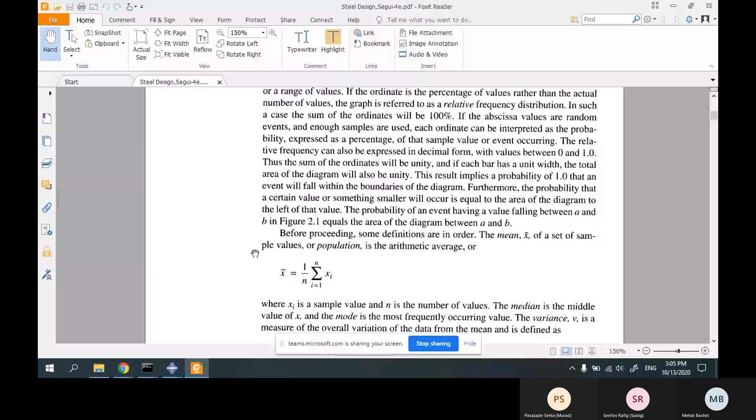What was the last thing? Do you remember? For steel design. Do you remember that, Sehla? What was the last thing? I don't know. The last lesson, teacher. Yes. Okay. The last lesson, the brittle material, ductile material, also brittle materials. Understood. Okay.

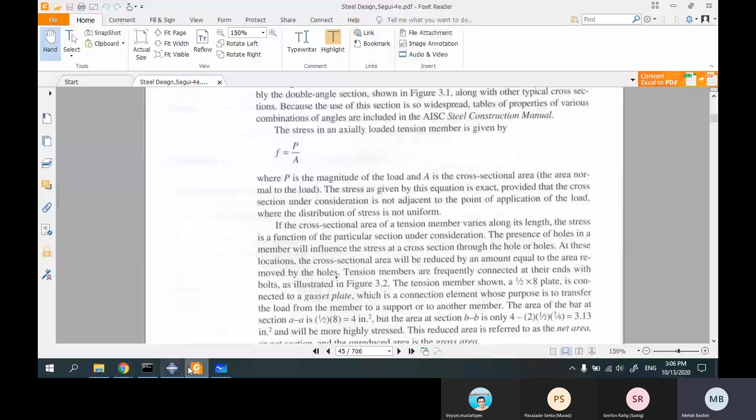So, let me check if it's recording. Okay, it's recording and you can see my screen. Okay, from now on, you have to use two books. One of them is a textbook, steel design, that I'm teaching. The other one is the specification. Specification is AISC. AISC, American Institute of Steel Construction. So this is AISC 360. This is the book that I'll upload. We can see it here, AISC 360.

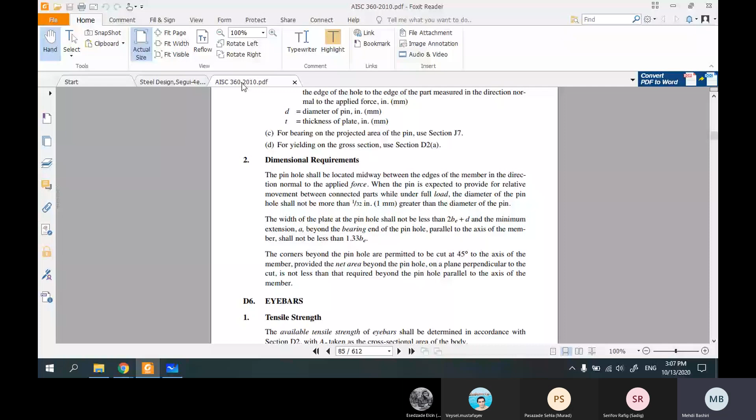And in this book, we have different chapters. In steel construction or steel design, we have to use equations and relationships that are not easy to derive. So I'm not going to ask you where, for example, this equation comes from. You just should use it.

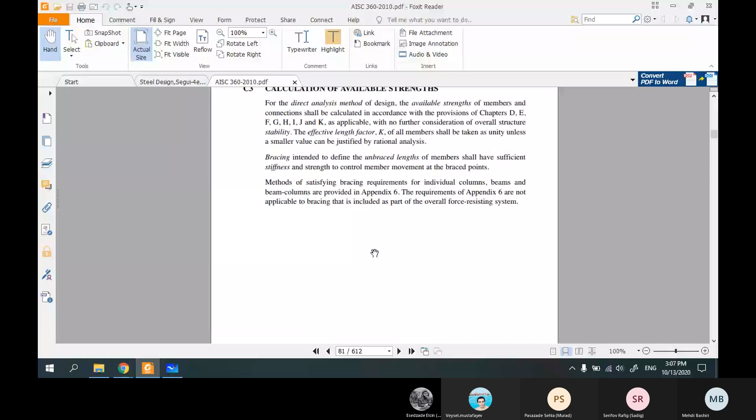Let's go to chapter D. This book has different chapters. Chapter A, B, C, D, whatever. We start with chapter D. Okay, we start with chapter D. So this chapter is for design of the members under tension. Okay, what does it mean?

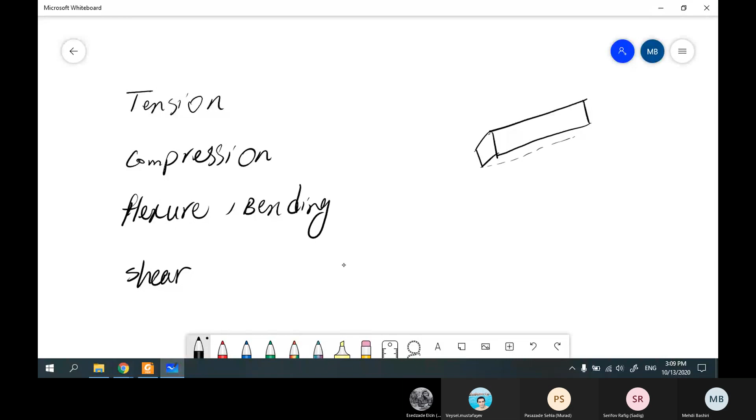If you remember from your different classes, we have different types of loading. One of them is, for example, tension. The other one is compression. The other one is flexure, or bending. The other one is shear. Depends on the loading. For example, you have a member like this. In this case, this member is under tension with the load T. Okay.

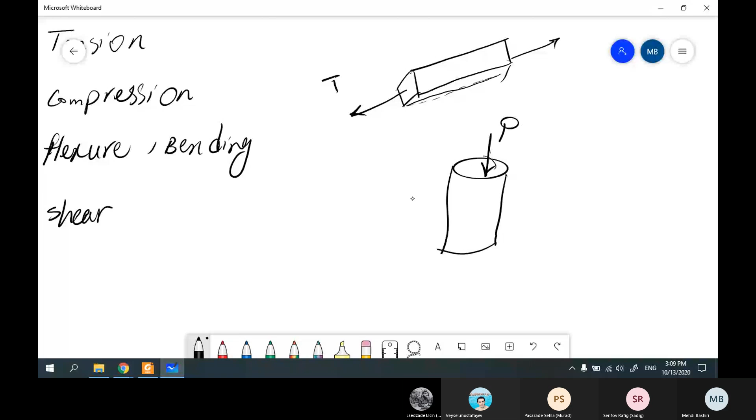In this case, for example, if we have a member with this force, the member is under compression. If we have the other case like this, for example, a beam, you know these different cases from structural engineering or from strength of material. I'm just going to review it. For example, if we have this type of loading, this is shear, this is compression, and this is tension.

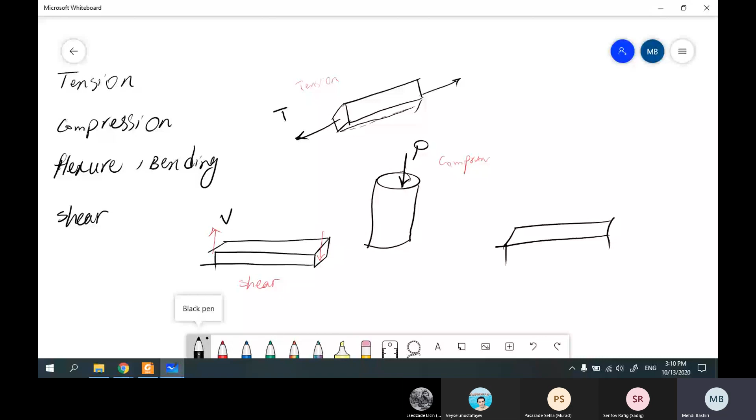Mainly, we show tension with T, compression with P, shear with V, and bending, the other type, mainly in beams, is moment. Bending is moment, like this, with M. Okay. So if I ask you to design a steel member, first of all, you should know what the loads acting on this member are. For example, this is a two-story building. You want to design this. In this building, we have different members.

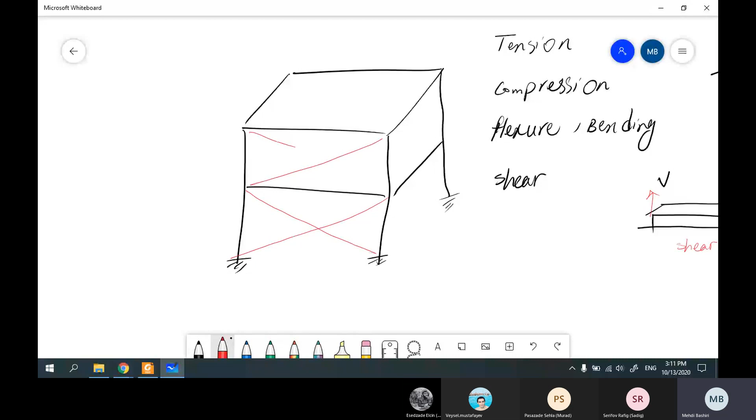They are beams. They are columns. These are braces. So we have different types of load, for example, dead load, live load, and their factors. I think we talked about it, yes, about dead load, live load. For example, one of them is 1.2D plus 1.6L. We have different loads acting. So depending on these loads, we have different responses in these members.

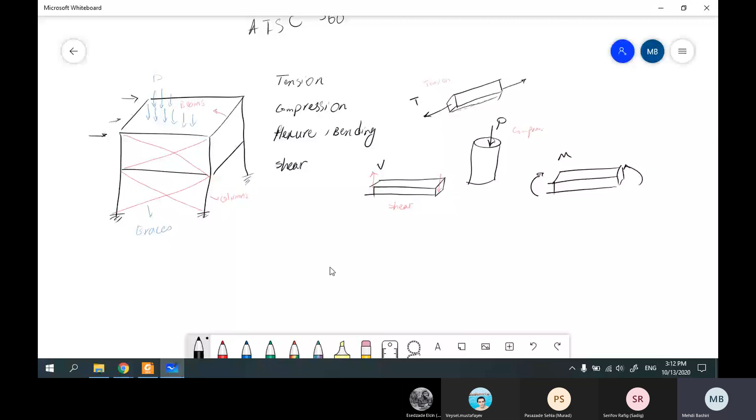For example, if we have these loads, braces are under tension. We use braces like this red one to resist against lateral loads. For example, earthquake, wind, they are lateral loads. They're acting from the sides, not from up or down. So we can resist against these loads. I'm just going to give you the whole idea about these parts. So, for example, we have braces, X brace, or let me see if I can show you the braces.

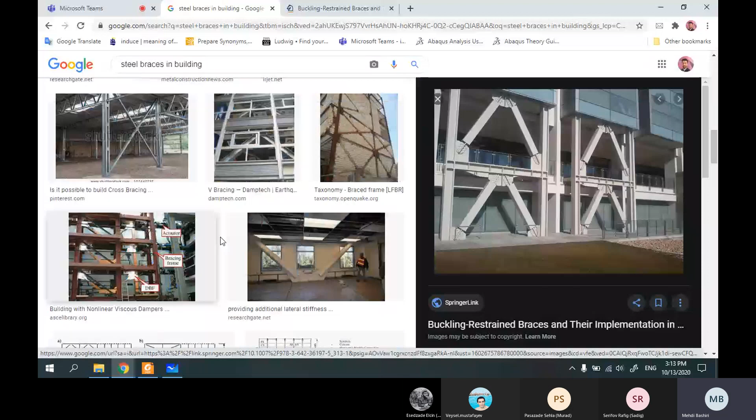For example, look at here, they are braces. Can you see it? Here, they are braces. Okay. The other types here, you can see that they are steel braces. We use them to resist lateral loads, and because of their type, they're mainly under tension. Okay, they're mainly under tension.

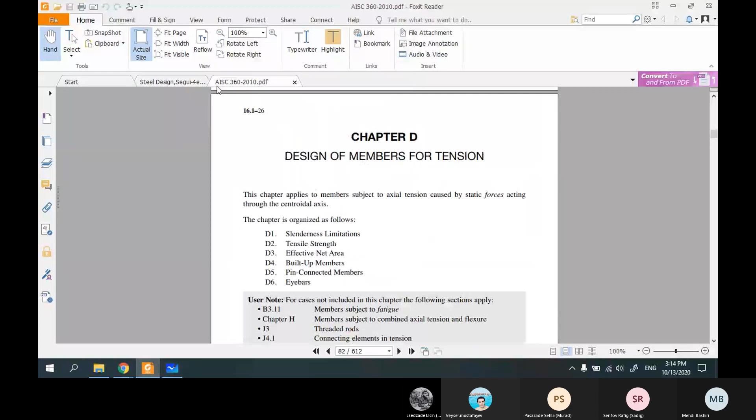When we want to design a member under tension, you have to first... This book explains the whole phenomenon, the whole concept in detail. So if you want to learn more about this type, you can read this book. But mainly, if you want to design anything in future, you have to use this book. It's AISC. Why? Because here it says that when you want to design, you have to use this formula. You have to use the other factors. Okay, effective area. So here you can have all the information, or you can have a summary of all the information because it's summarized. Anyway,

so let's talk about the designing of tension members or members under tension. In all the cases, not just for tension, for compression, for flexure, for shear, in all cases we have different failure criteria. What does it mean? It means, for example, let me show you. I have a project right now. I can show you this.

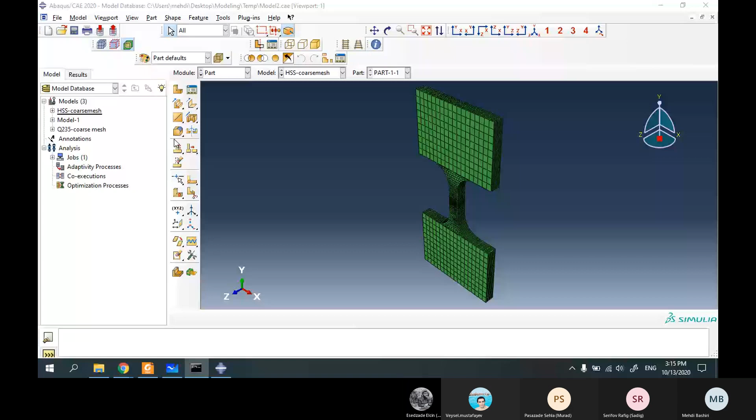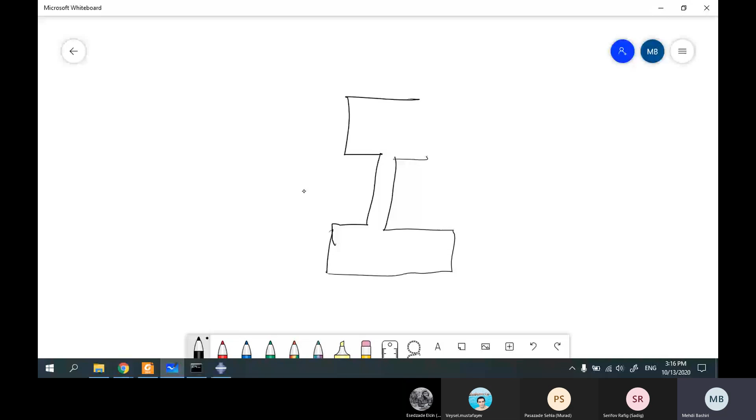For example, this one. This is a member. For example, here you can see that this is the force, and this is a member, a steel member, and look at the direction of this load. It's like this. We have a member like this, under tension. Okay, this is tension. We'll see that if we increase the load, what's gonna happen? Look at here. This is the failure. We'll have rupture in here.

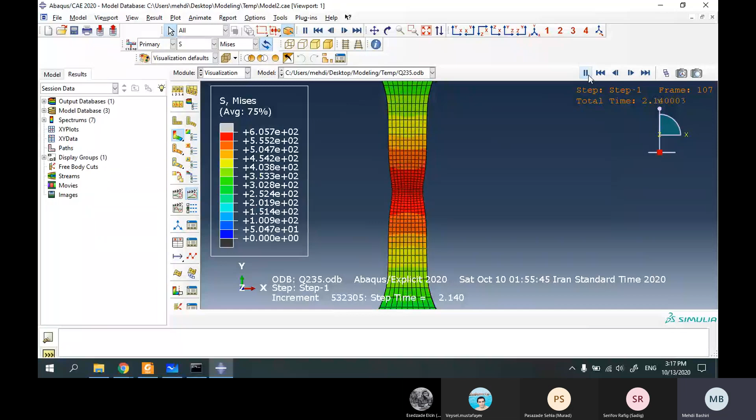Let me show you. At first, you can see that. If you remember, I told you about necking. Okay. At this part, if you focus, you can see that we have necking in here. One of the failures so far is necking, or yielding in other words. And if we increase the load, what's going to happen? Failure. You can see that we'll have failure and finally rupture. Okay, you'll see that this is the rupture.

So if I ask you what are the failure criteria in tension, you can say that one of them is yielding. The other one is rupture. Okay, so if you want to design something, you must check if the member resists against these failures. So it's obvious when you need a member, you shouldn't let this member fail.

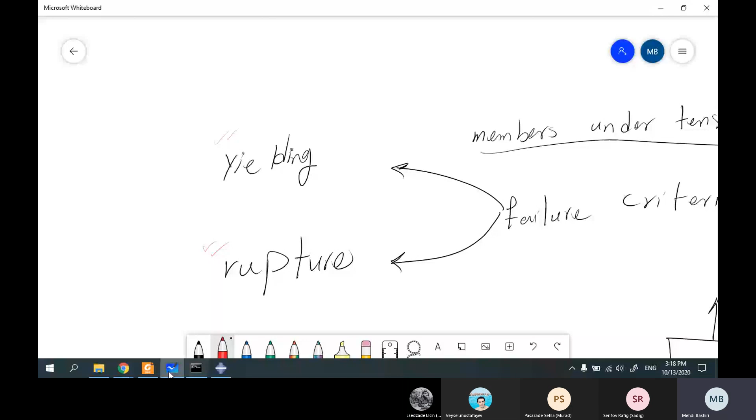Okay, so in this case, look at here. In this part, this member is not useful. You can't use it. It's not functional. If you have a rupture in your member, you can't use it anymore. For example, suppose that in your structure, look at here, you have a rupture in here. So it's not functional, and the structure will collapse. Suppose that you have, for example, a failure here, a failure here. So these failures affect the capability and the ability of your structure. So you have to prevent these failures. How? By following some instructions. Okay.

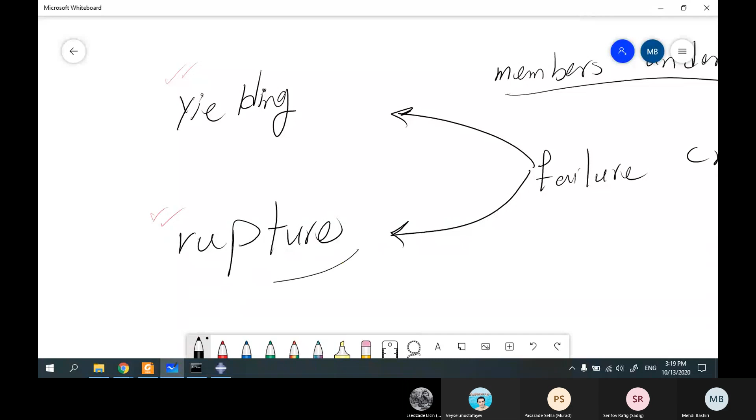Rupture is obvious. I already showed you. This is the rupture. Okay. But what about yielding? If you remember, I talked about the behavior of steel. For example, like this. Okay. This is stress, and this is strain. If you remember, I told you that this part is elastic and this part is plastic. The maximum capacity in the elastic part was Fy, F yield, stress at yield.

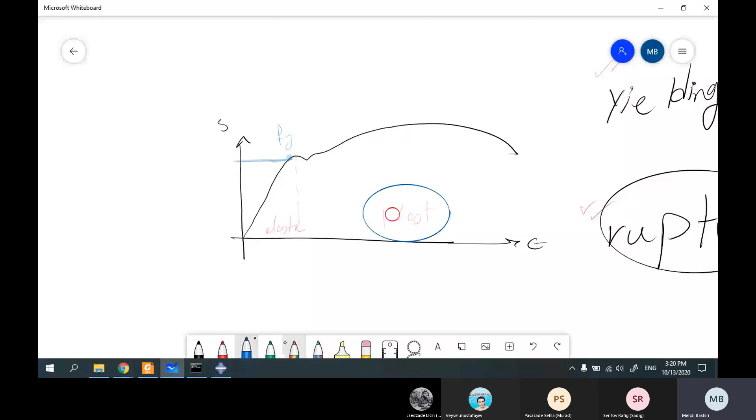I told you that in here it's plastic. The behavior in here is plastic. So in many cases, not in all, but in many cases, if you are in this part, it is not acceptable. So you should avoid being in this part. So the other criterion that you have to prevent from happening is yielding. So far you have to check yielding and rupture. Okay. The other thing that you have to check at the end is slenderness.

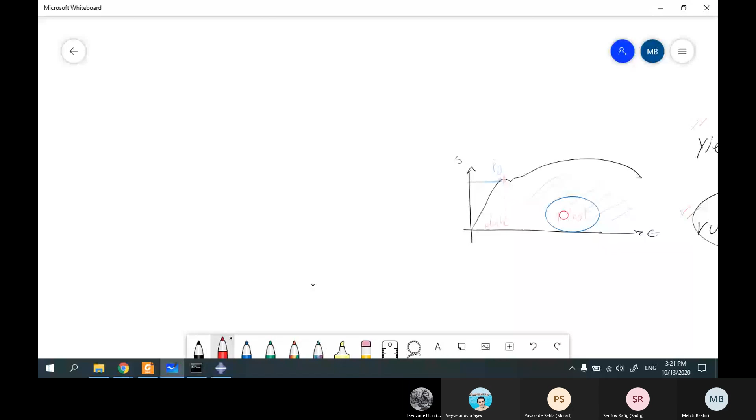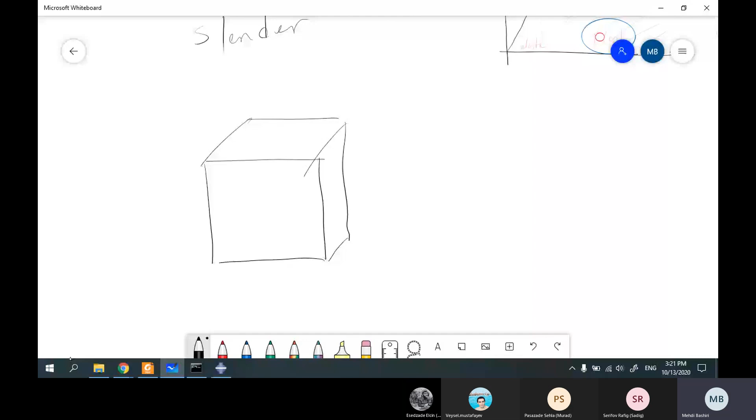Slenderness. Do you know what does it mean, slender? Slender, for example, this is a member in this dimension. For example, the length of 2 meter and the cross section of 1 meter in 1. Okay, you can easily see that these dimensions are somehow consistent. What does it mean? That means the cross section is 1 meter and the height is 2 meter. But what if, for example, we have cross section of 1 centimeter and a length of, for example, 10 meter? Okay, it works like a needle, like a needle.

Okay, so in construction, you are not allowed to use any dimensions that you want. So the dimensions should be consistent, as I said. Or in the other cases, for example, suppose that you are using a column like this. For example, 4 meter in 4 meter in 3 meter. Okay, this one is not economic. You can't use this. You're wasting your money. You're wasting the material. So you have to make a balance between every dimension. Okay.

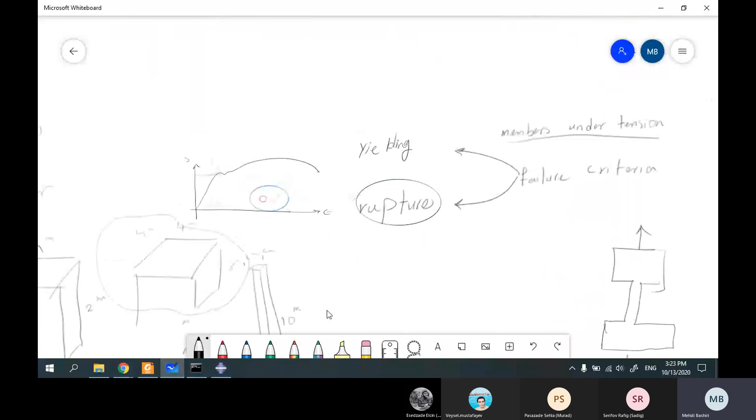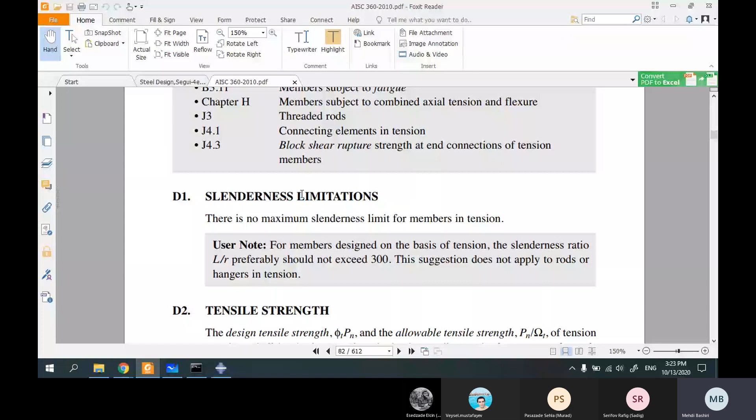So far I talked about the failure criteria. So how can we check all these criteria? Here you can see that from the beginning, it says in here we have to check. The first one is slenderness, and the second one is yielding, and the last one is rupture. So in this chapter, you just need to check these three criteria. So let me summarize it again. For example, I'm asking you to design a member like this. For example, this is a beam. Okay, this is a beam.

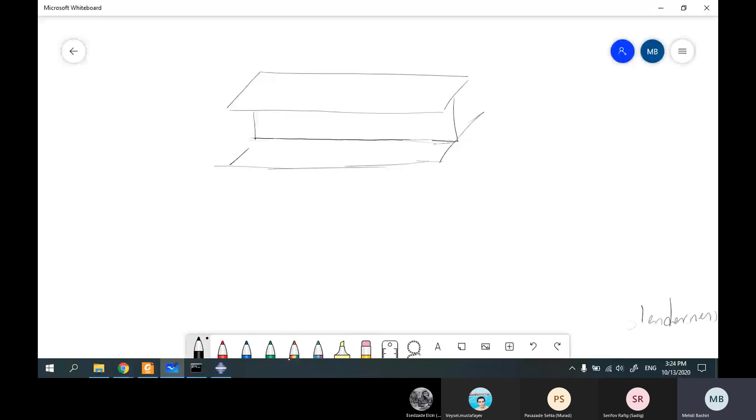If you remember, because of the shape, it is called what? I section. Why I section? Because this section is like letter I. Okay. This member has different properties. One of the properties of this member is its length, L. The other one is its cross section. Cross section is like this. Okay, the cross section is like this. I section.

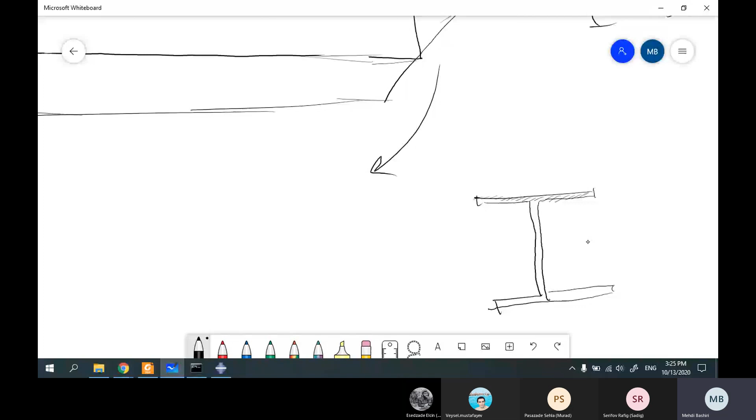This section has different properties again. The most important property is what? Area. The most important thing is area, and we show it with A. The other thing is this one. We show it with B. H, T, with TW, and TF. Okay, TW, TF. What are they? We call this, or we can show it with BF even. If you remember, we call this flange. Okay, flange. This one is called web.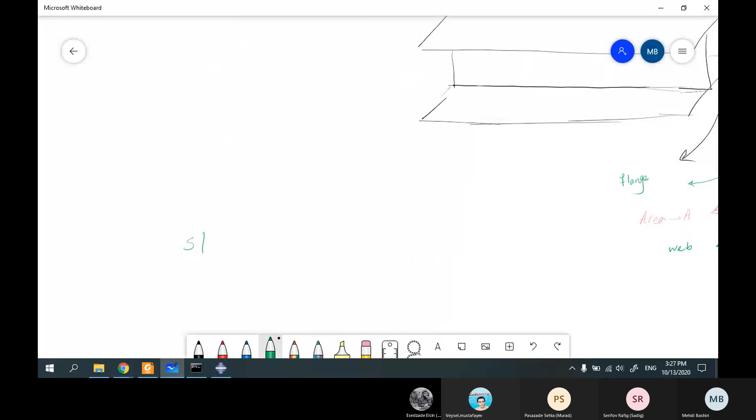Okay, so it's obvious. What is TW? The thickness of the web. What is this? Thickness of the flange. This is the area of the member. And BF is the width of the flange. H is height of the member. So if you know these parameters, you'll know everything. Okay. From the strength of material, you know that stress is equal to force divided by area. Okay, force divided by area.

Sehla, how is the quality? You can hear me well? You hear me or not? Elchin. Sorry. Yes, teacher. Okay.

Okay. I was talking about this one. Stress is equal to force divided by area. So if I want to find the final force, what would be the final force? Force is equal to stress times area. Okay, stress times area.

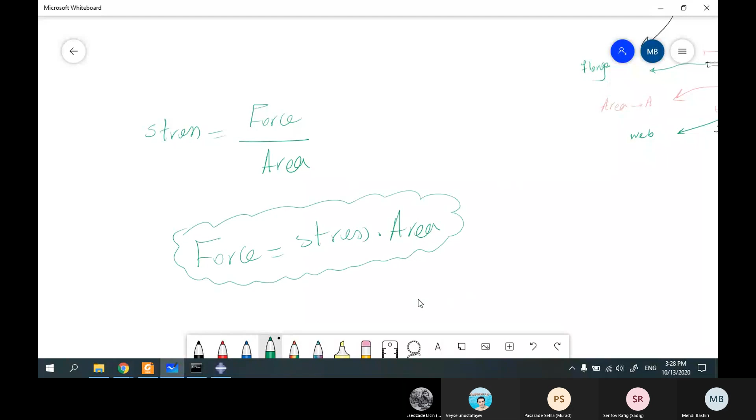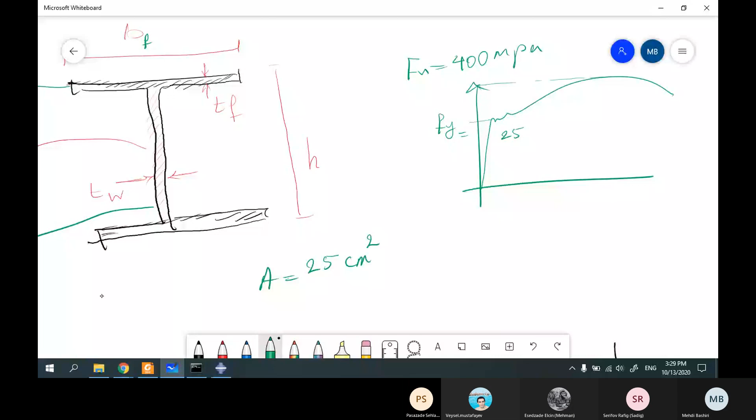So in here, for example, in this section, if I tell you that the cross-section area A is equal to, for example, 25 centimeters square. Okay, the cross-section area is 25 centimeters square, and based on our test like this, I told you that this is Fy and this is Fu. If I tell you that this is 400 megapascal and this one is 255 megapascal, if I ask you, what is the force at yielding?

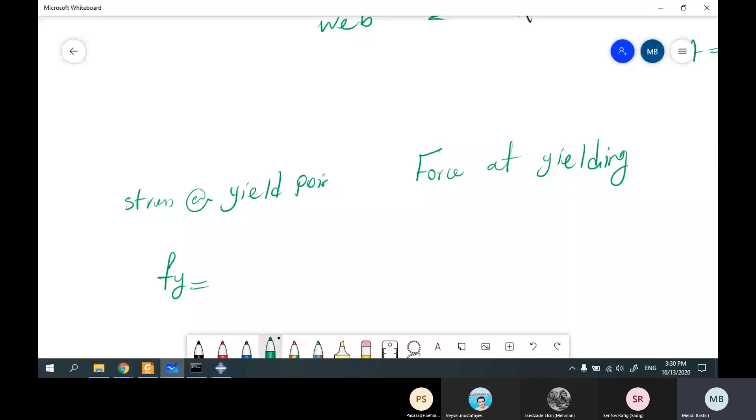To find the force at a yield point, all you need to know is that Fy, as I said, is stress at yield point. Okay, and it is given here. Sir, I'm sorry. Can you repeat the last part? Which one? Yield part? Yes. This one? This curve? Okay. I told you that, for example, in experiment we have such thing. Okay. This is a steel member.

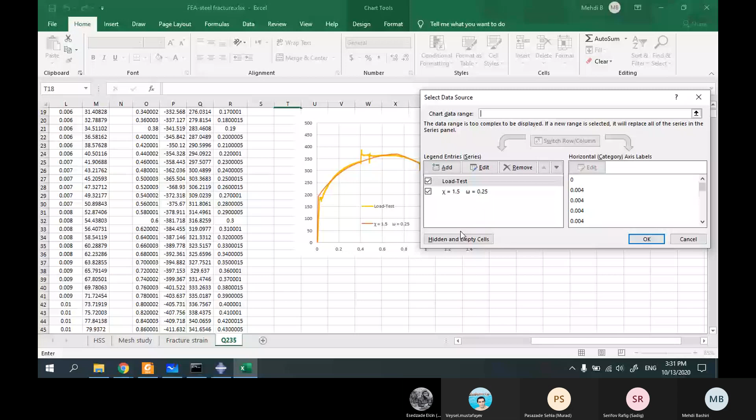Okay. We perform tests on samples like this to find its behavior. For example, before, when I was a student, I performed a test on this sample, and this is the answer of the test. You can see that this is the real behavior of this test.

So after this test, you'll see that before this point, let me zoom it, we have a straight line. It's completely linear. Okay. But at this point, we have nonlinear and plastic behavior that I talked about. At this point, you can see that we have the maximum capacity and then the capacity reduces to 0. Okay, this is the real behavior of steel.

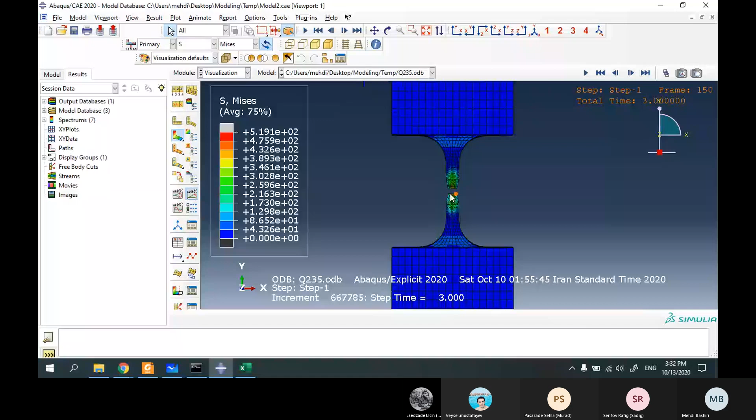So I have this sample and perform a test on this, and as I showed you, this is the test. Finally, we have this. Okay, this is the failure, rupture failure. After performing this test, we'll get this one. In this case, let me show you.

In here, this is F, or let me write it in this way. In here, we have yield. What was the yield? The yield point is a point that before it we have linear and elastic behavior. So you can see that after this point, we have plastic behavior. Before that, we have elastic. And this is the maximum point. What is this? This is ultimate.

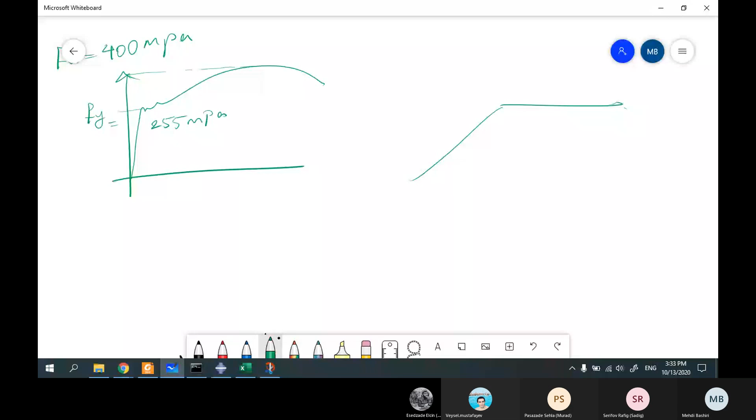But suppose that you are constructing a huge building, for example, a 100-story building, like a tower. You can't test it to see if it works or not. To make it easier, you test a small sample like this, like in concrete technology. If you remember, I told you that we have cubic samples or cylindrical samples. We check the capacity of the concrete with these samples, and when we find the capacity, for example, f'c, we use it in our calculation.

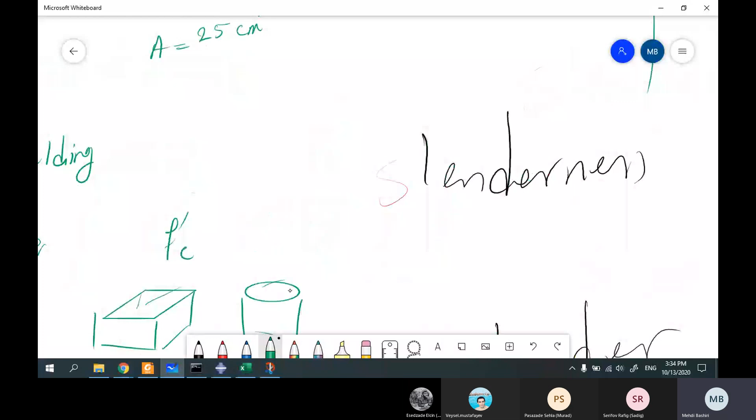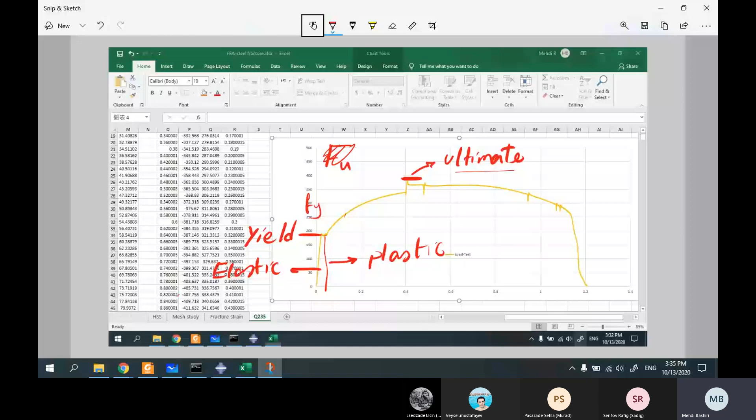We can't test a huge concrete column in the building. So instead, we test small samples, and when we get the information like this, we use this information instead of testing a huge building, and it's accurate. So at this point, we have ultimate capacity, and we show it with Fu. U stands for ultimate. At this point, we have Fy. Sorry, this is Fu, not capital F. So this point is yielding, and this point is ultimate.

So by performing tests, we'll have this behavior. And when we get this one, we can design and check our structure. How? Like this. As I said, we have three probable failures. One of them is yielding, like this.

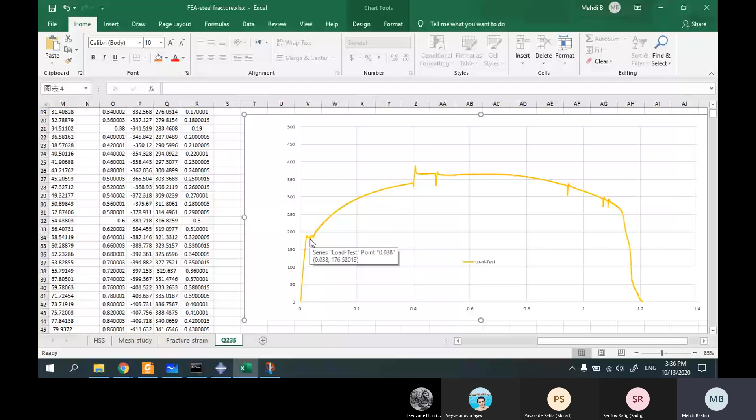Because if you are designing, I'm not talking about a huge earthquake. I'm talking about your load when you are in your home, or in your classroom, or in the kitchen, or wherever. When you are in that level of performance, you are not allowed to be in here. This one is not permitted. When you are in ordinary performance, all you are allowed is here. So yielding is one of our failures.

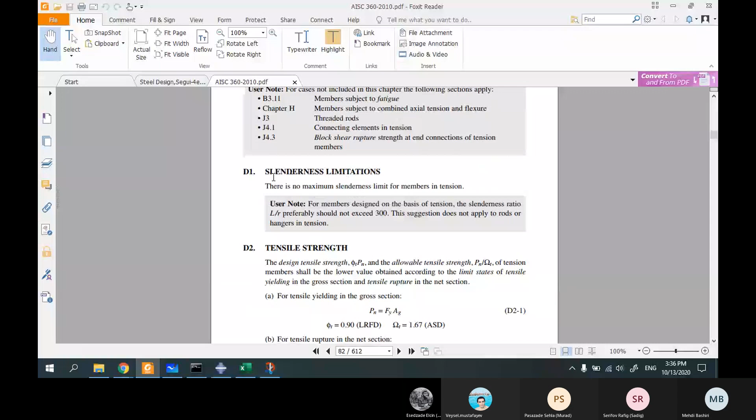The second one is rupture that I talked about, and the first one that I told you is slenderness. I told you that it's not reasonable to use this member for your structure. For example, when you are making fences for your yard to prevent animals from getting inside, you are allowed to use this section. But when you are building structures, you're not allowed to use them. So the other thing you have to check is slenderness. The other one is yielding, and the last one is rupture.

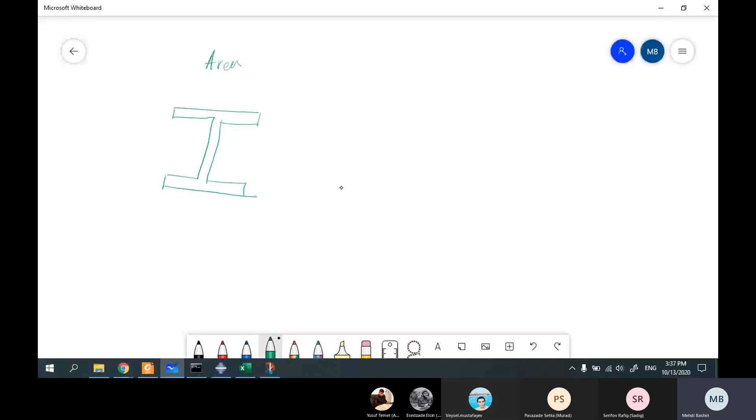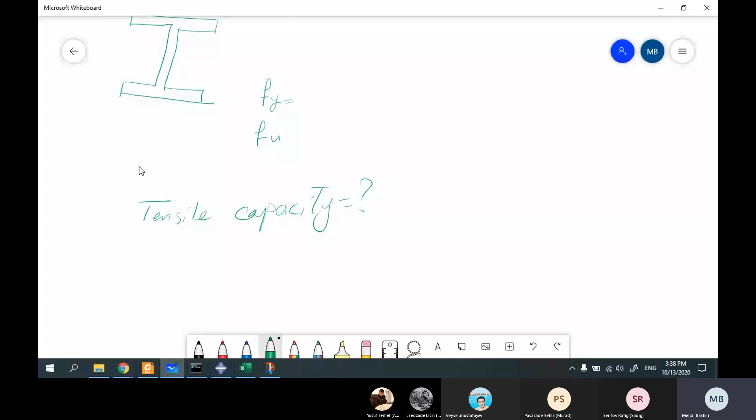Okay. Suppose that I gave you this information. For example, I gave you all the geometry of this section: area, length, and for the test, Fy and Fu, and I ask you to find the tensile capacity. What is tensile capacity? Not just in tension, in all chapters, this is the process.

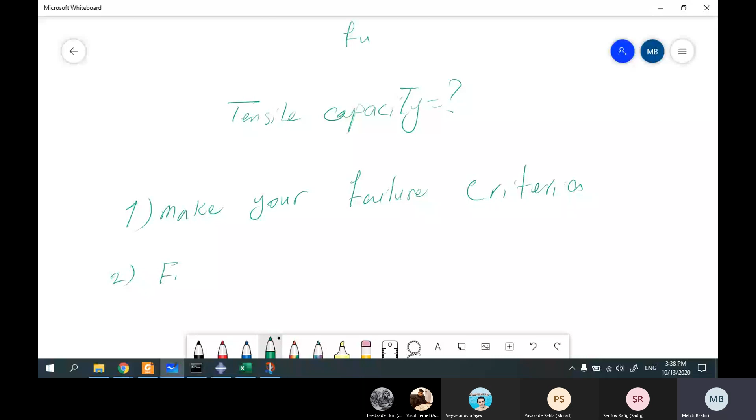First of all, make your failure criteria. Okay. The second step, find the capacity for each criterion.

Three, the final capacity is the minimum amount among all of the criteria.

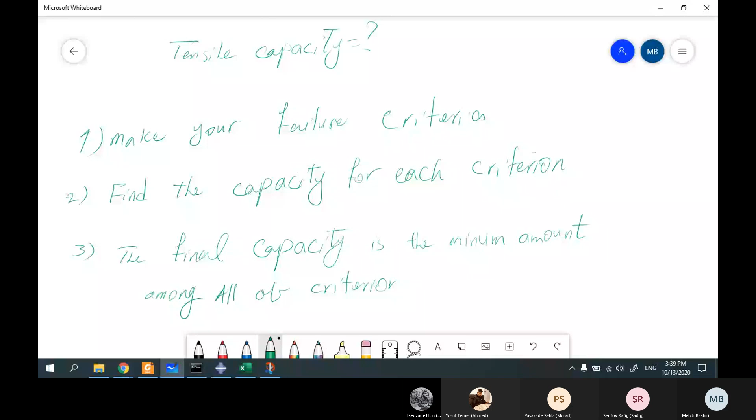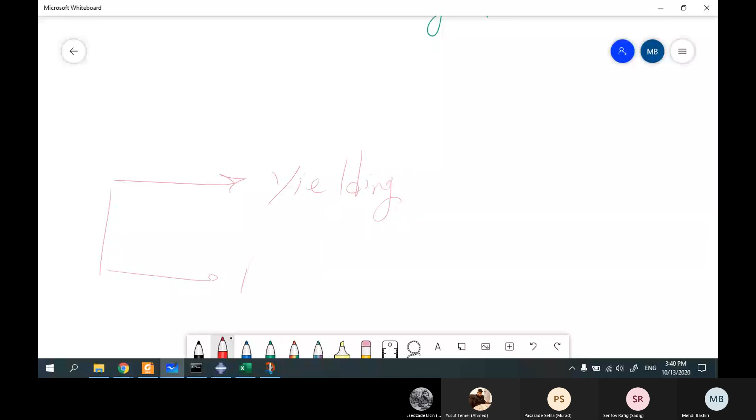At the first step, the main criteria, as I said, the first criteria is yielding. Second one is rupture. And the last one was slenderness ratio. Okay.

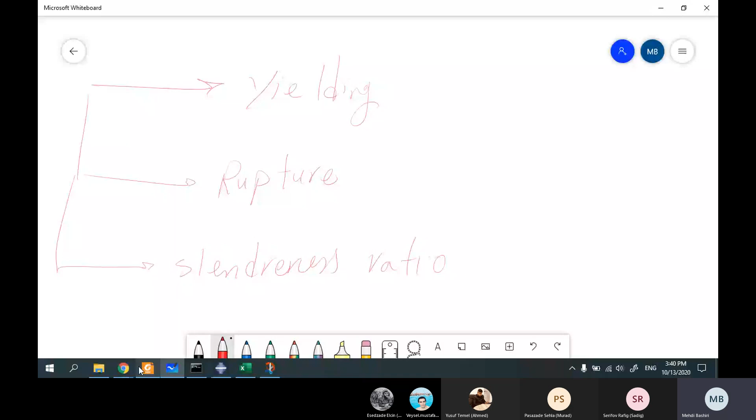If you want to check the yielding capacity of a member, you have to follow this equation. Look at here. For tensile yielding, you have to use this equation D21. Okay. Equation D21 says that the final capacity, Tn, for example, for yielding for Tn1, or let me write it in T,

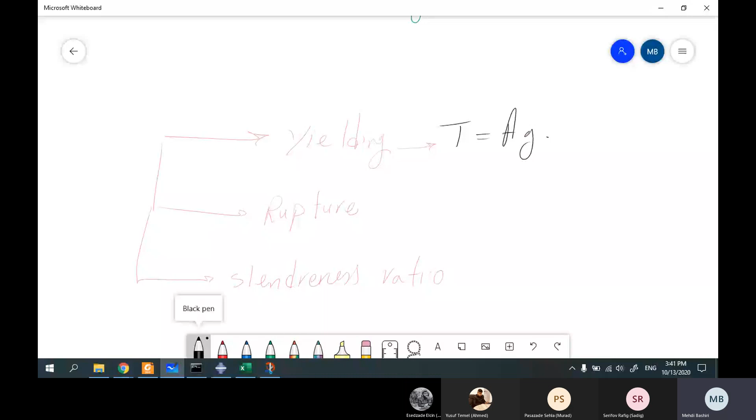is equal to Ag dot Fy. What's this? I told you. Let me find it. Force is equal to stress dot area. But what is stress? What area? Ag and Fy. What is Ag?

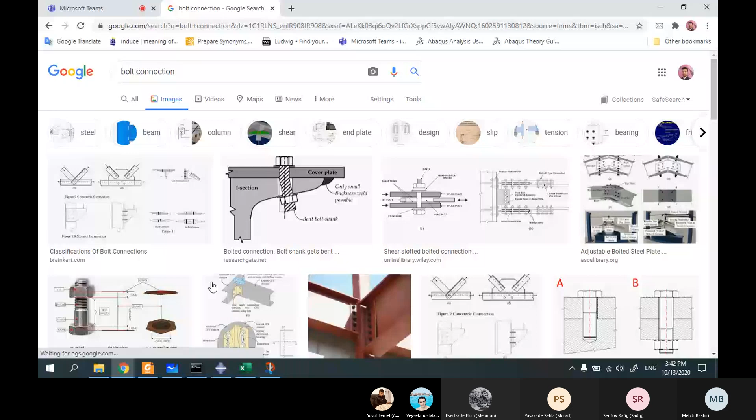For example, let me see if I can find something for you. For example, like here, like this. Okay. This is a connection, and here we have a member. Or like this. Here, for example, this is, if you remember, this is a U channel member. This is a U channel. If you see, we have a couple of bolts here, like here. And but in this part, we have nothing.

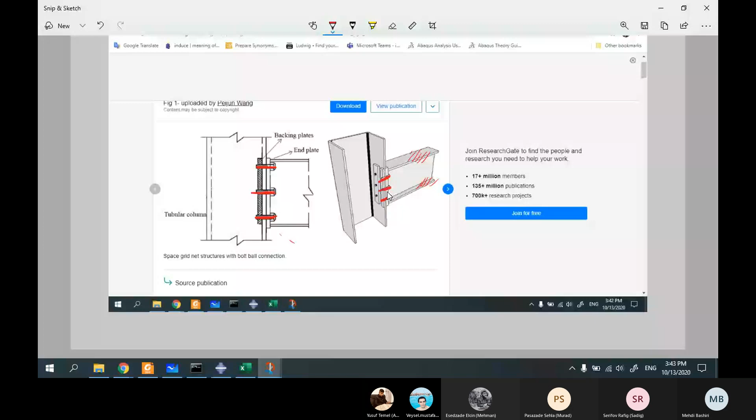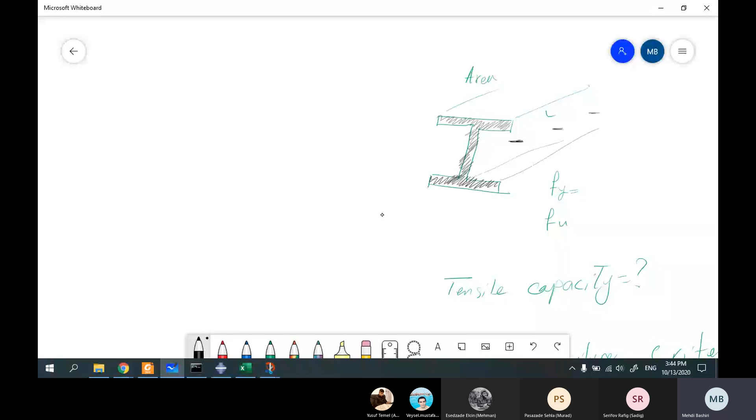Okay. When we want to find the capacity, we have to know which area we should use. For example, this cross-section area or this cross-section area that we have a couple of holes. You can see that we have holes here. Yes, we have holes here. So in these cases, the whole area like this without considering any holes, okay, we may have a couple of holes here, okay, but we have nothing here, okay.

The area without considering any holes is called gross area, and we show it with AG. G stands for gross.

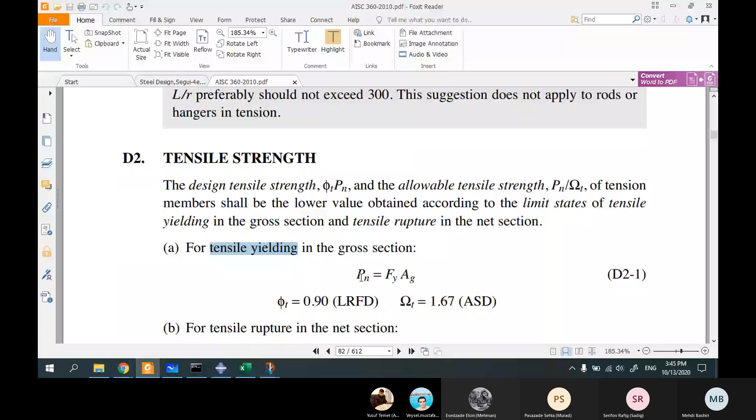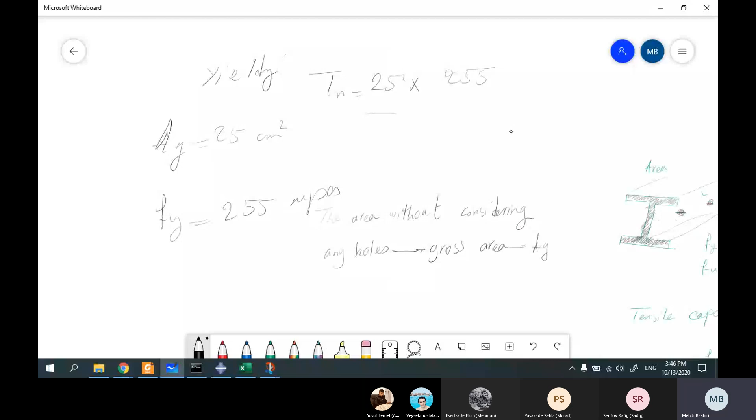So in this book, it says that if you want to find the tensile yielding capacity, you should follow this equation. For example, in our case, AG is 25 centimeters square. Fy is 255 megapascal. What is the total tensile capacity? 25 dot 255. This is for yielding. In future, for example, the answer is 10 ton. Okay, I'm not sure, just an example.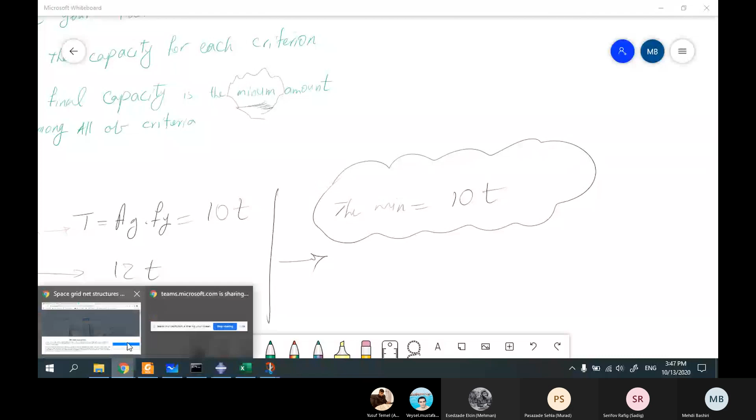Okay, for example, for this one, where is the criteria? For this one, we got 10 ton. For this one, we got 12 ton. For example, for this one, we can pass this one. What is the total capacity? I told you that you have to take the minimum. Okay, we have to take the minimum. So the minimum is 10 ton. Your final capacity is 10 ton. Okay. The final capacity is 10 ton.

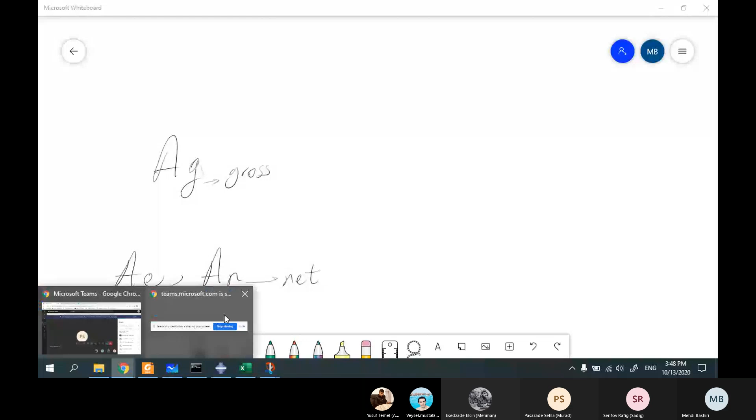I have to say something, and we'll continue our class for next time. So far, I talked about AG, gross cross section. But we have another thing: AE and AN. This is effective, and this is net. This one is gross, gross cross section. I already told you what is gross. Let me see if I can find any better.

Okay, YouTube is not working here. And I'm using VPN as well. Why? It's filtered here. Okay. Let me see if I can show you. Okay.

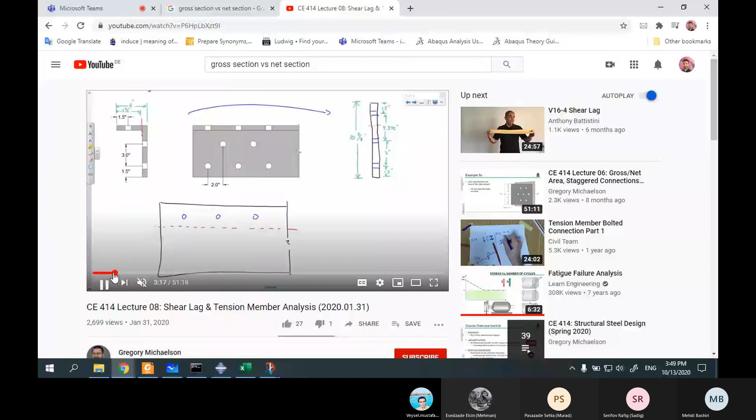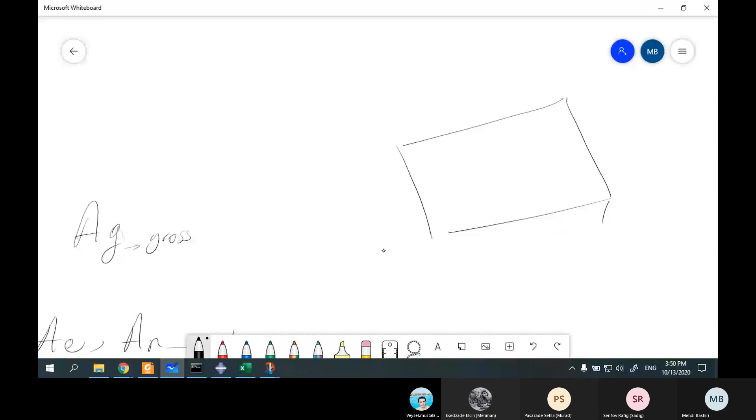For example, this shape. Okay. For example, this shape. We can see your screen. Okay, if it's okay, so I write it here. So, for example, you have this section and you have a hole inside this section. Okay. Suppose that the dimension of this is, for example, 10 centimeter, that's 2 centimeter. And the diameter— sir, you didn't share your screen. Okay, ah, you said it can't? I thought you said it can. Can you now? Can you see it? Yes. Okay.

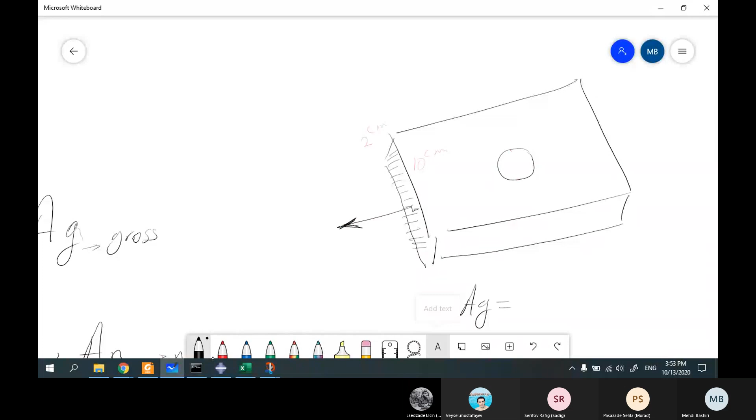The cross section of this hashed part, this part. What is the gross area? 2 times 10. This is the cross section.

But if I ask you, suppose that this is a hole with a diameter of 2. If I ask you to find it, I'm gonna add a section cut here. What would you see if I add a section cut? The thing that you would see is something like this.

Yes? Okay, so if I ask you to find an area here, the area is here, like in this section, the area is this. So what is the area? What is the red, the highlighted area?

The highlighted area is 2 dot 10, and this one was 2. So 2 dot 10 minus what? Minus this part. Okay, what is this part? 2 dot 2.

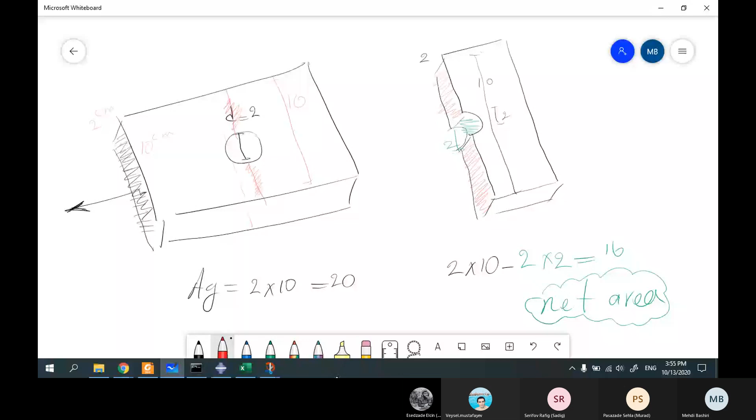So what is this? I'm looking from the top. The total is 10 minus this 2. Okay, you can see it here. Look here, this part doesn't count like this.

So let's see your screen. You can't or you can? I'm recording it and I'll upload it again so you can have a look.

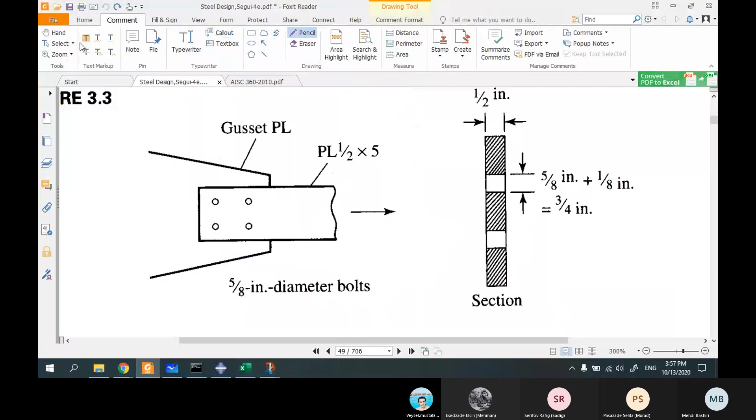It says that the plate dimension is 1/2 by 5. What does it mean? That means the thickness. It says that the thickness is... the plate is like this.

I'm gonna show it in 3D. This is the plate, like this. The thickness is 1/2. The smaller one is the thickness, 0.5 or 1/2, and the width is 5.

Can you see this symbol? It means it's a lined plate, so the length doesn't matter. Okay, so if I ask you what is the gross cross section, you can say that the gross cross section is 0.5 dot 5, so AG is...

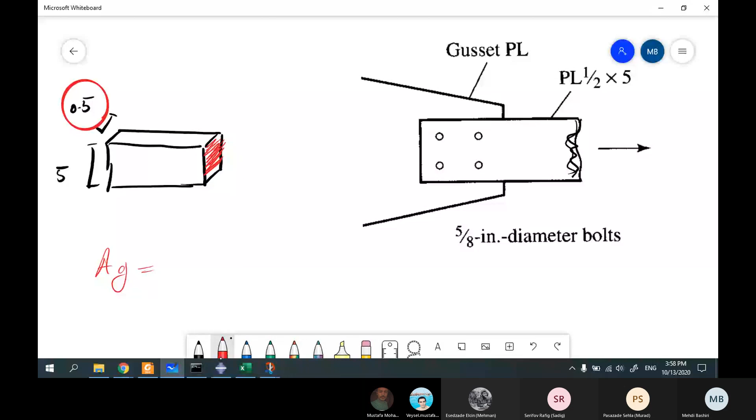0.5 or 1/2 dot 5 inch square. In here we have two holes. For example, if I ask you what is the cross section here...

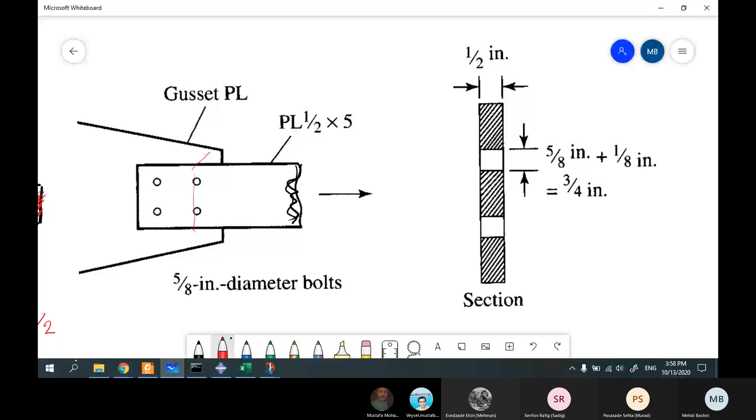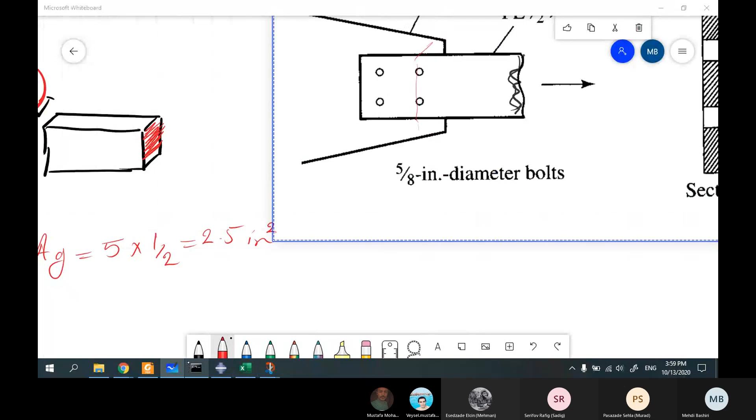If I ask you what's the cross section here, you can't say, if I ask you what is the net cross section, you can't say 2.5 anymore. Why? Because we have two holes. They are holes, they're not there. There is nothing inside. So it says that the diameter is 5/8. Okay, the diameter is 5/8.

Now I'm gonna ask. Okay Rafiq, can you answer this? For example, this is your plate. Okay, yes, this is your plate, and you have two holes like this. Okay.

The thickness is 0.5, and the diameter of each hole is 1 inch. Okay, answer, what is AG and what is AN or net? Can you answer this? Okay, AG is...

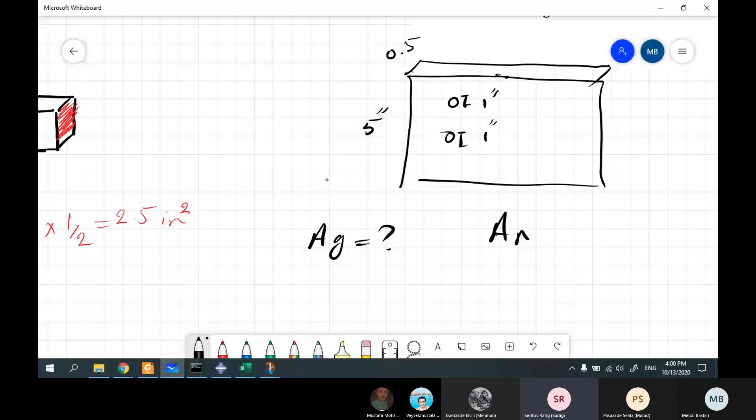No, I mean this is the area. Okay, what is this length, the red line? Can you tell me what is the length of this red line? 3. The red line, yes, 5 minus 1 minus 1. And the thickness is 0.5. So this is...

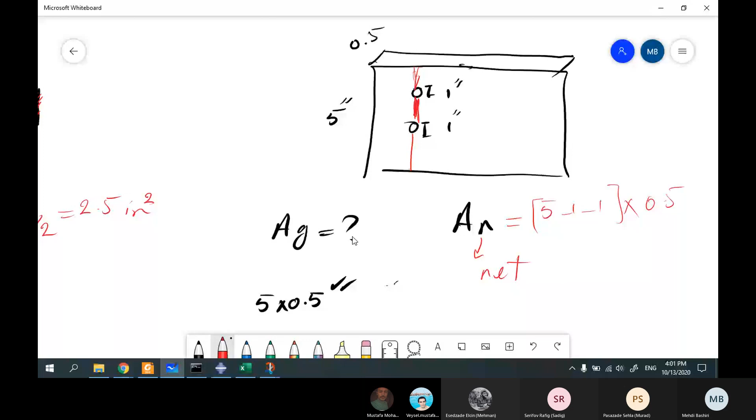Your net area. Okay, we're not gonna consider that holes as a circle, yes? No, yes, you know why? Because if you look at it at this part, you're not gonna see a hole. Look at here, you'll see a rectangle. Can you see it? Can you imagine it? That's why we consider it as a rectangle.